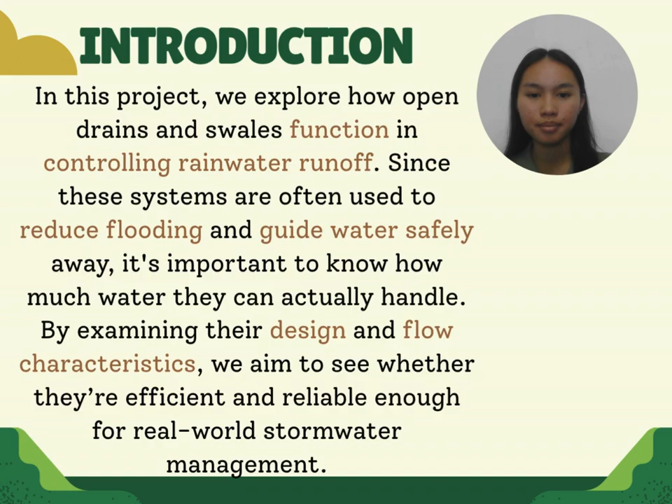Moving on to the problem statement. For our project, there are four problem statements. Firstly, open drains and swales are often used to manage rainwater, but their capacity is not always clearly understood. Secondly, during heavy rain, these systems often overflow or cause erosion because they are not functioning as intended. Thirdly, poor design and lack of maintenance make the problem worse, especially in areas with increasing rainfall. Finally, this raises the need to properly evaluate their capacity to ensure they are reliable during storm events.

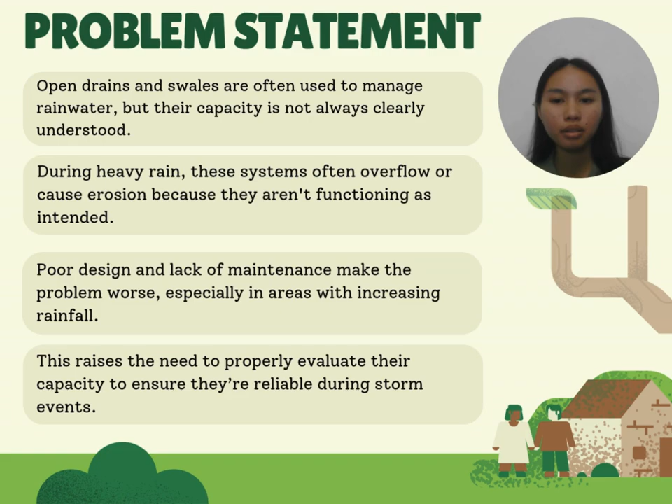The first objective is to estimate the flow of the open channel drainage system. This is essential to understand how water behaves in open channels such as rivers, canals and drains. Next, we aim to analyze the key parameters of the Manning equation. This includes the Manning roughness coefficient, which represents surface resistance, the hydraulic radius, which is the ratio of the flow area to the wetted perimeter, and the channel slope, which affects the gravitational force driving the flow. Understanding these parameters helps us to determine their individual and combined influence on flow rate.

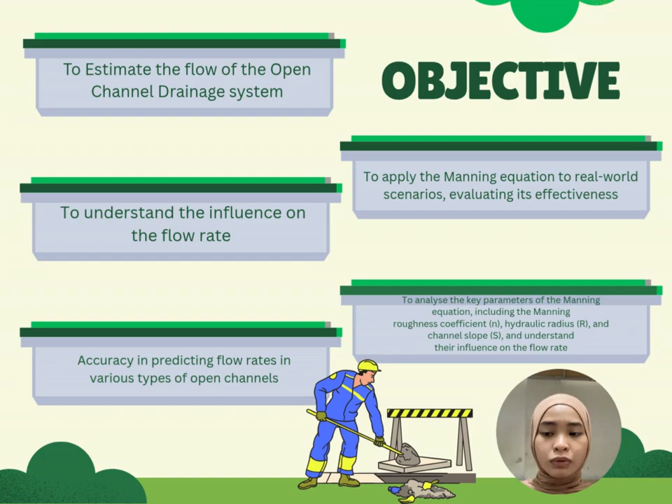Third, we aim to understand how these factors influence the flow rate, helping in better design and maintenance of drainage systems. Our fourth objective is to apply the Manning equation to real-world scenarios, evaluating how effective and practical it is when used outside of theoretical calculation. Lastly, we assess the accuracy of the Manning equation in predicting flow rates for different types of open channels, ensuring reliability in diverse conditions.

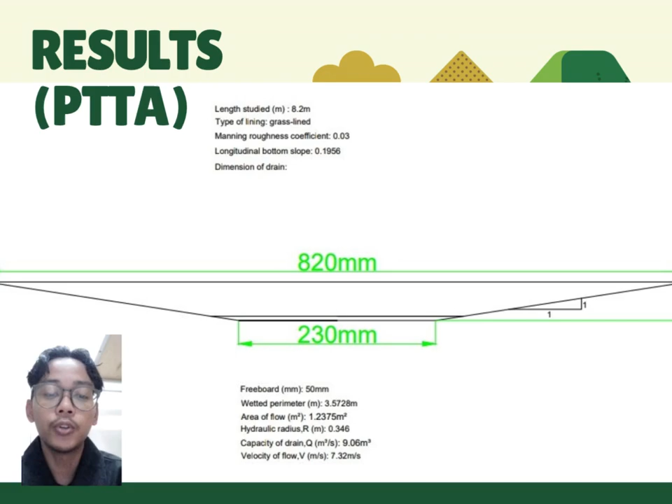We get the result for the area is 0.466 meter square. For the wetted perimeter, we get 2.380 meter. For hydraulic radius R, we get 0.196 meter. And for the velocity V, we get 0.74 meter per second. For the capacity of the drain Q, we get 0.345 meter cube per second.

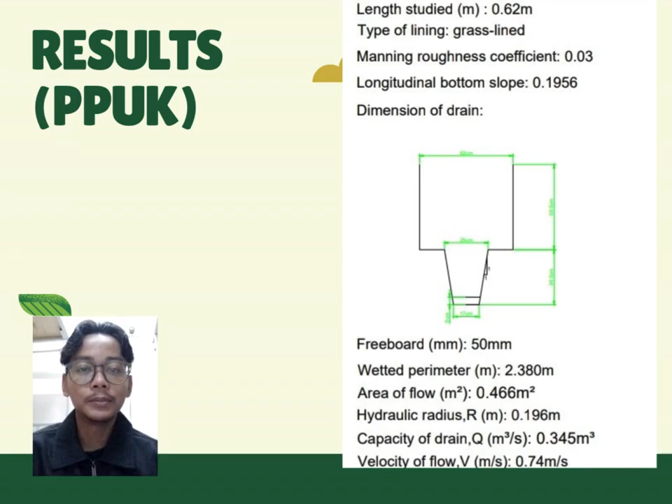Moving to our references, the first source is Open Channel Hydraulics by Sturm T.W., published by McGraw-Hill Education in 2010. This book offers fundamental insight into open channel behavior. The second reference is Wastewater Hydraulics: Theory and Practice by Hager W.H., published in 2010 by Springer. It provides detailed theory applicable to both clean water and wastewater systems. Lastly, we use a 2023 publication titled Uniform Flow Depth in Trapezoidal Open Channels by A.R. Vatankhah. This paper helped us better understand modern approaches to analyzing non-rectangular channel profiles.

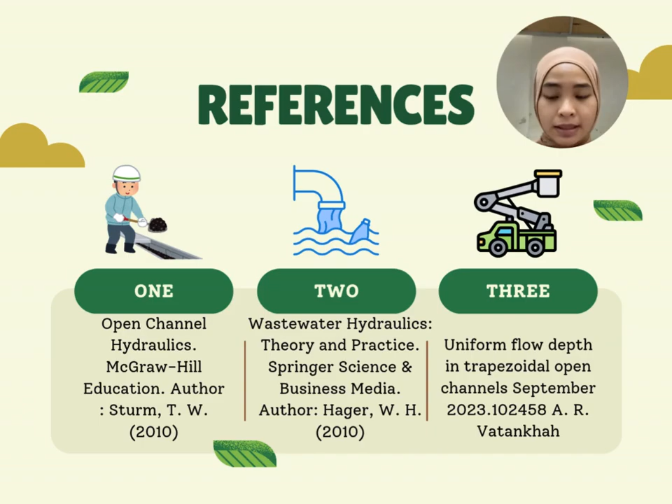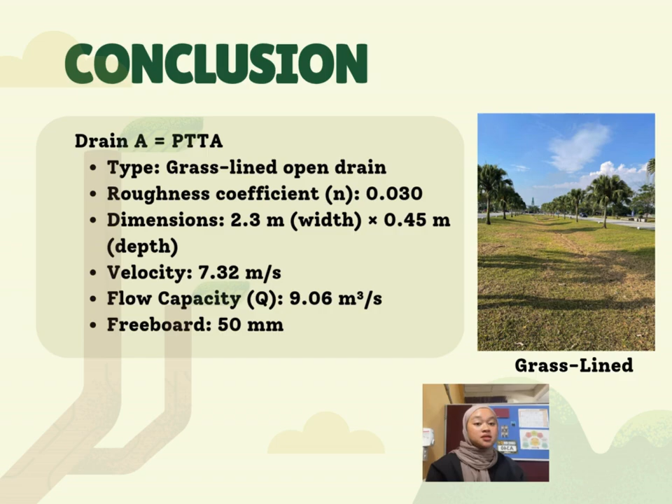This is drain A, which is at PTTA, Perpustakaan Tunku Tun Aminah. The type of drain is a grass-lined open drain. The roughness coefficient N is 0.030. The dimensions are 2.3 meter width times 0.45 meter depth. The velocity we get is 7.32 meters per second. The flow capacity Q that we calculate is 9.06 meter cube per second. And the freeboard is 50 millimeter.

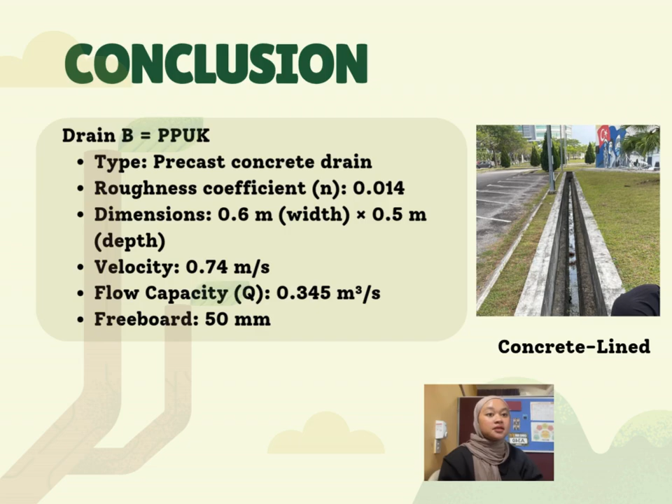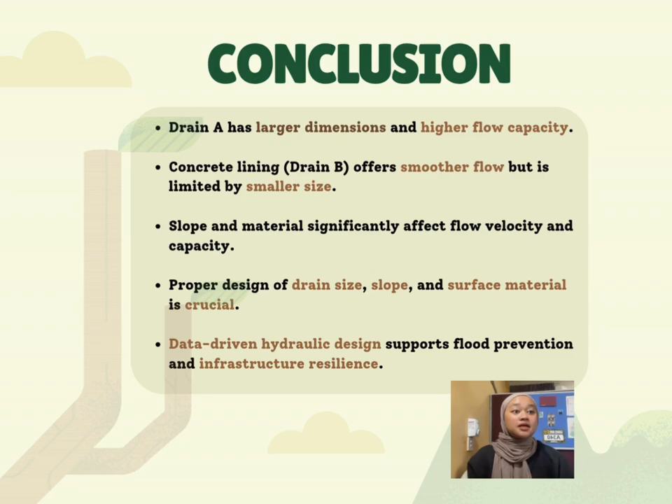So for the conclusion: drain A has a larger dimension and higher flow capacity than drain B. Second, concrete lining at drain B offers smoother flow, but it's limited by a smaller size. Third, slope and material significantly affect flow velocity and capacity. So proper design of drain size, slope, and surface material is crucial. Data-driven hydraulic design supports flood prevention and infrastructure resilience.